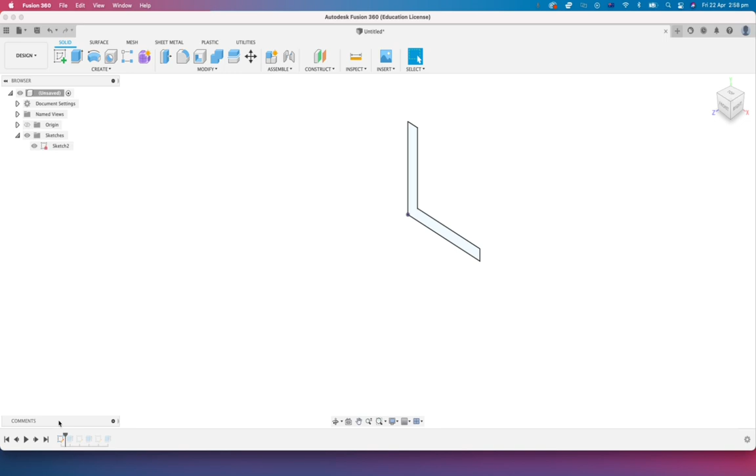So the first thing I did was a sketch, which you can't currently see because the sketch is actually not visible. There we go. There's the sketch. Now I can go forward one step, and we did an extrusion. Now let's jog along to the next sketch here. Okay, now you're going, hey, why is the sketch not visible? Again, let me turn them on here. Okay, so those were those two circles there that I created. My next step was that I did an extrusion. I actually cut through that body there.

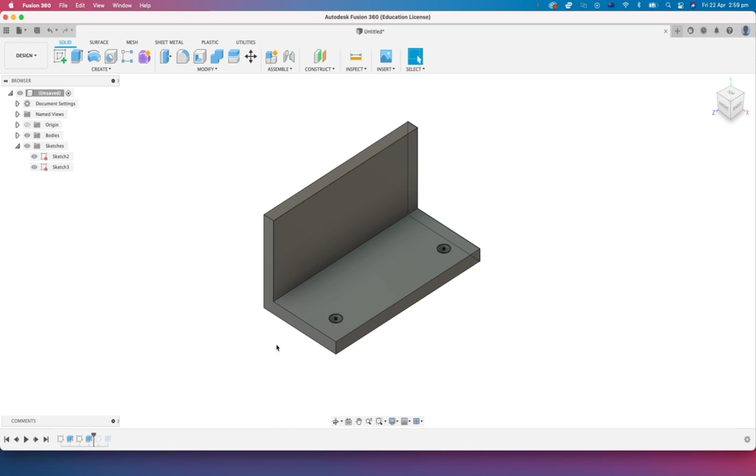Moving forward, okay, I did two more holes or two more circles. I'm going to turn those on for you, which you can see. And then again, I did another cut through there, like so. All right, no problem. So I'm just going to turn those off. All this does in here, when you turn these off, it just turns the lines off there, just neatens the visibility up a little bit.

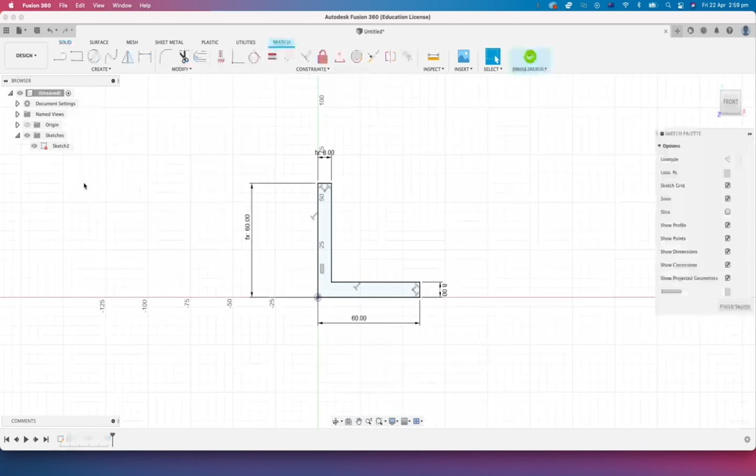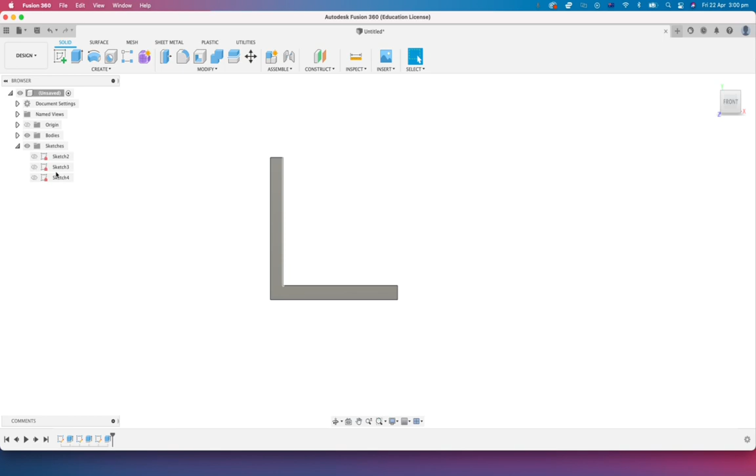All right, so the first thing the client's requested is that we change the thickness. Now, I have lots of sketches here. In fact, I've only got 3, right? But if I jump into this one, sketch 2, and edit the sketch, you will see that it's that one. And this is where I need to change this 8 to a 6. So I'm going to click on here. Remember, these are driven dimensions when you see FX there. So I'm going to click on 6 there, and hopefully everything has updated. Wonderful. I'm going to finish that sketch. So sketch 2, probably a good idea for me to rename that. I'm just going to double click on that and call that angle.

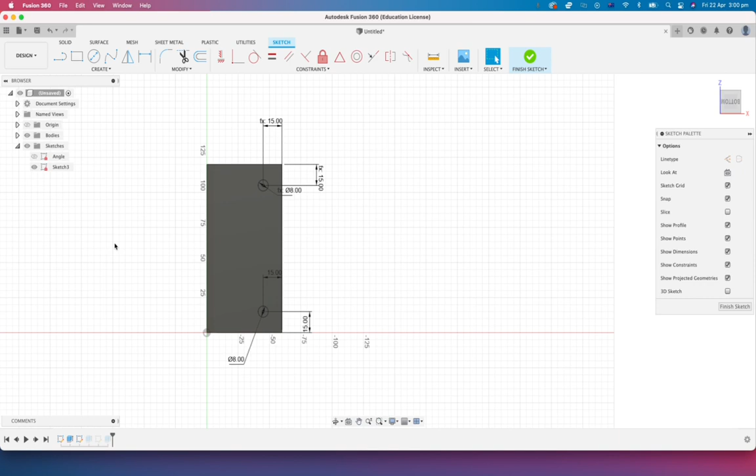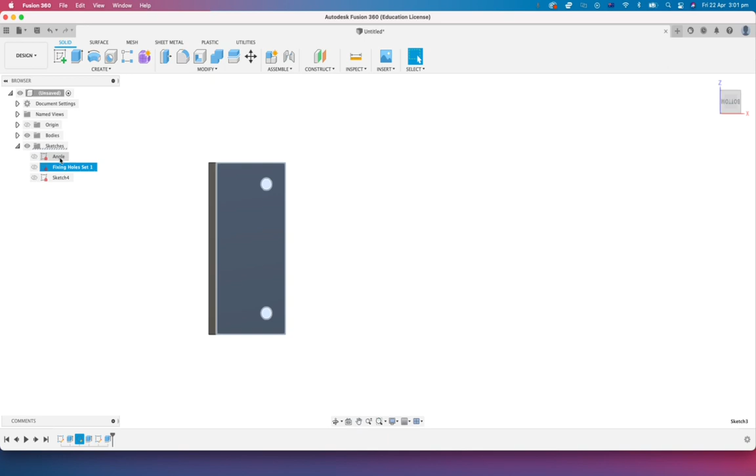Sketch 3 is actually, if I edit this, these holes here. Now, I didn't need to adjust those ones. The client was happy with those. But what I probably should do is rename this. So I'm just going to double click there. I'm going to put fixing holes, set 1, let's say. Finish the sketch. So now you can see that I'm getting some detail here, and I like to refer to this as paperwork. Let's just click back on the home button here.

Okay, sketch 4 here. Let's edit that. So we can see that these guys are actually those larger holes. We've currently got them at 15 millimeters. The client has requested that we change that to 12. So I'm just going to type in 12 there. I only need to do it to the one because all of the others would update. I could have 50 holes in the thing, and all of them are going to update. So it's nice to have these sort of driven dimensions.

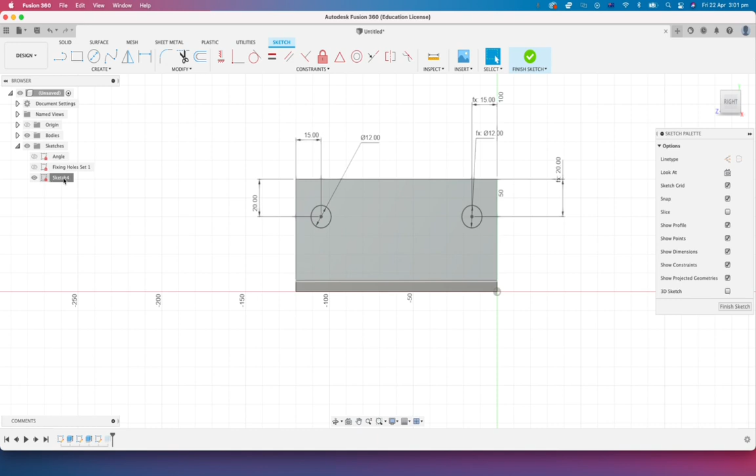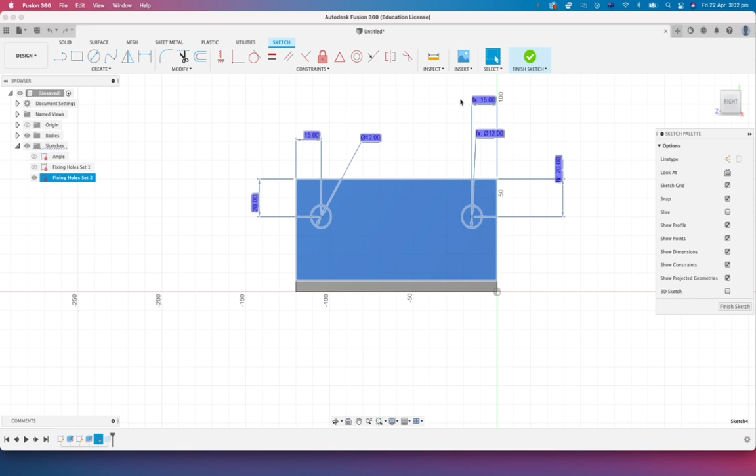And what I'm going to do is rename this. We'll call that fixing holes set 2. It's just a good idea to give your sketches a reference name, so that when you need to make those adjustments, rather than trying to go through and find what's what, it's easy because you can just see it. I'm going to finish the sketch and click on the home. Everything is done. Job done. That was simple.